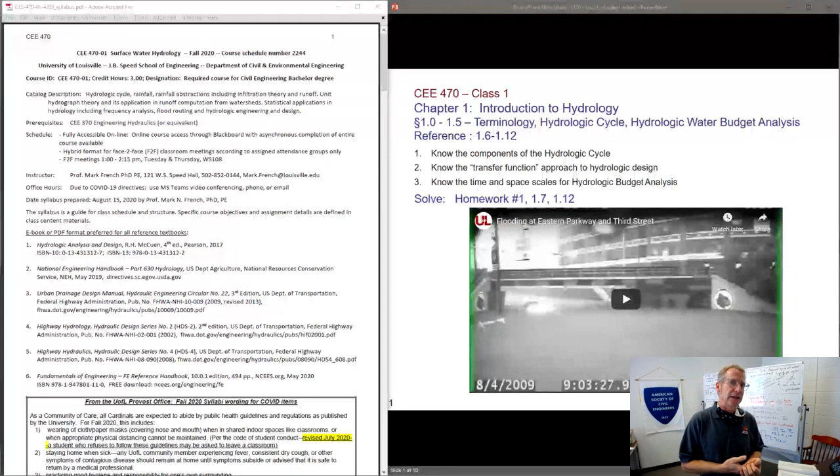As you know, our class meeting number 1 is entirely online. We won't be meeting in the classroom on Tuesday. This will be our presentation recorded. What I plan to do is make a recording something like this for all of our class sessions that you'll be able to view and watch online before class meeting if you want. What we will do in the class meeting will be to answer any questions about what this content is or any clarifications that are needed.

Again, you can log in through Collaborate for those online classes if you're not in the attendance group, which gets to why I have the course syllabus shown here again. The course syllabus overview was posted for you to take a look at, some additional information in there, so I'm not going to look at all the details here. What I want to go to in the syllabus is this course overview again. Remember that no attendance is required. Everybody is given an attendance group, and so those are the days you can attend the class.

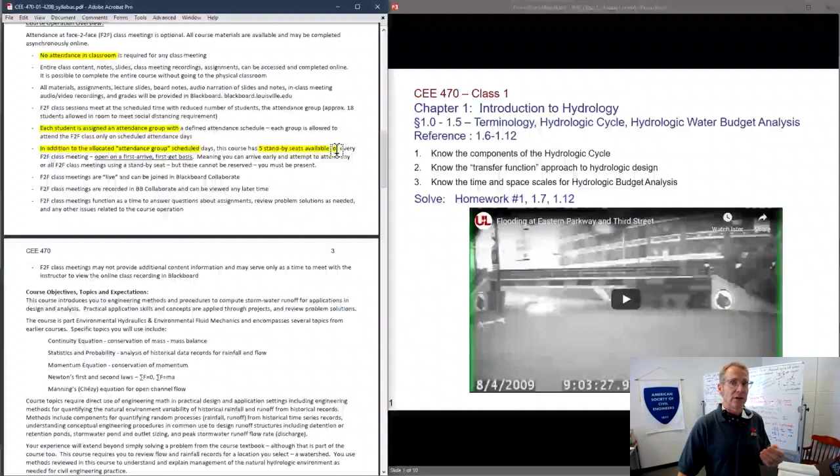In addition to the attendance group, there are going to be 5 standby seats available. So I believe I divided the class into 4 groups, and that still allowed for 5 more people to attend. So I've put those on standby so that if you wanted to attend additional days, more than your attendance group only, you can come in then. All right, that's how that's going to work. Yes, it'll be limited to the 5 first people.

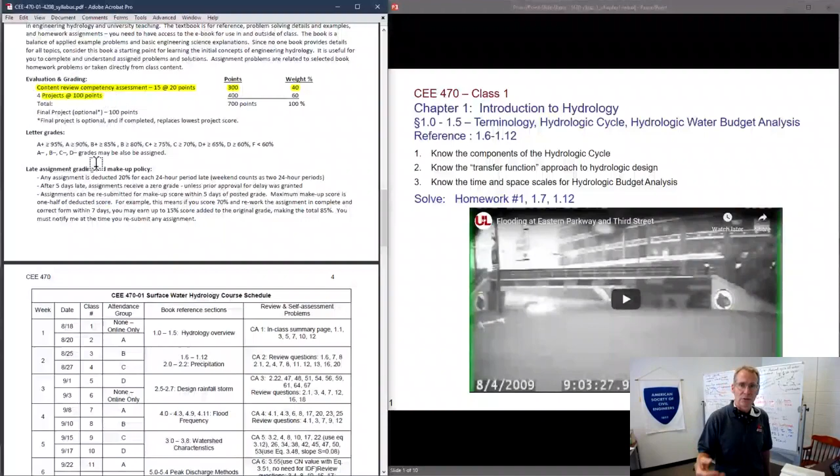What else? I want to look at our competency review assessments. These are going to be online through Blackboard. Those are going to form the content of what we get out of our book and the homework problems. So you will answer those online. That's my plan. So you won't have to submit any document that way. And then of course we have our projects. So the projects are the documents you will submit and work on. I believe project 1 is already posted. So we'll talk more about that in a minute.

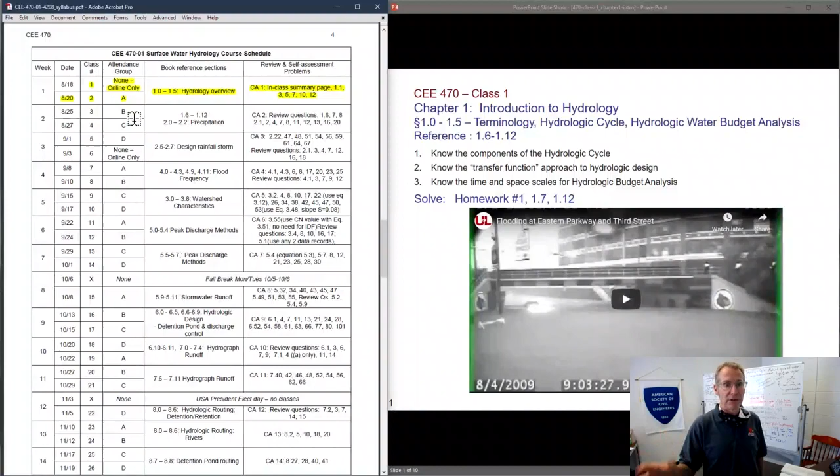So here's class 1. We're meeting only online for that. That counts as our Tuesday meeting. And then on Thursday, see if I can highlight that. Anyway, on Thursday, attendance group A can come to class, as well as 5 other people. If you're not in group A and you want to try to come to class, you can. Again, no class attendance is required. The content for class meeting 2 will be posted prior to that class, and you can review it just like this. All right, I won't go through all the details of the syllabus then. I think that is everything.

All right, so I'm going to close this, and we're going to start looking at our class content. We'll have the slides and the board notes together, and then I will go over those with you in this recorded session. So I'm not going to be writing the board notes up as we did before, since I can prepare them ahead of time, since all this has to be recorded anyway. So let's just take a look at this. What you see on the board notes right here, I'm going to switch to this pencil tool, see if I can mark that, for example.

Yes. So we will be looking at things out of our book that you will be asked to refer to and answer some of those questions on those assessments. Hydrograph, let's get to that in just a minute. I wanted to include here the parts of the book that we will be referring to. These are the 3 main topics, and that's what we'll look at on our class slides. I've included a couple YouTube videos for you to look at. These are right here in our own area.

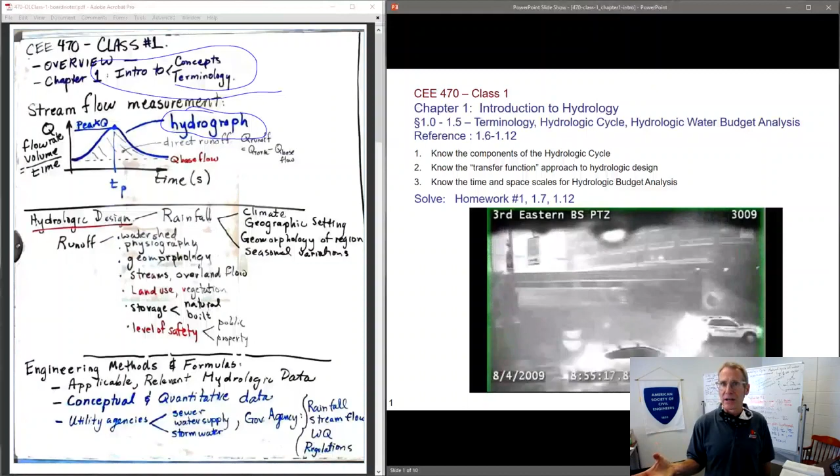This is, of course, the viaduct down at 3rd Street and Eastern Parkway, and it still is subject to flooding. But this is one of the issues with urban hydrology. And many of you will probably be working in cities and trying to help come up with ways to mitigate this. What are the ways we can mitigate that? It's a very challenging issue.

So if you watch this whole video, watch the cardinal bird there, you will see that that becomes, I'd say, about 2/3 submerged. And next time you're out there, you can see how deep that water is. I believe they've got it marked, you just can't see it here. There's another cardinal bird right over on this one. So you see somebody driving their car into the water, and that's partially because it's very hard to tell what the depth of water is when you're driving.

So from a transportation engineering point of view, it's important. From a utility point of view, it's important to try to prevent or understand at least how our infrastructure is going to be responding to rainfall runoff. So that's an important thing for us.

One old-timer rule of thumb is, and you see this railroad is built way up above, even before that viaduct was in there, that railroad may have been built. And they say that in the old days when railroads were getting put into the U.S., typically they would be well above the high water marks that were evident to the surveyors that were laying out these routes and elevations for the railroad beds.

So if you didn't have any other information on how high to make your roadway, and you wanted to stay out of the most severe floods, you could use those as an indicator. Anyway, I'll let you watch that. Let's go on to the next slide.

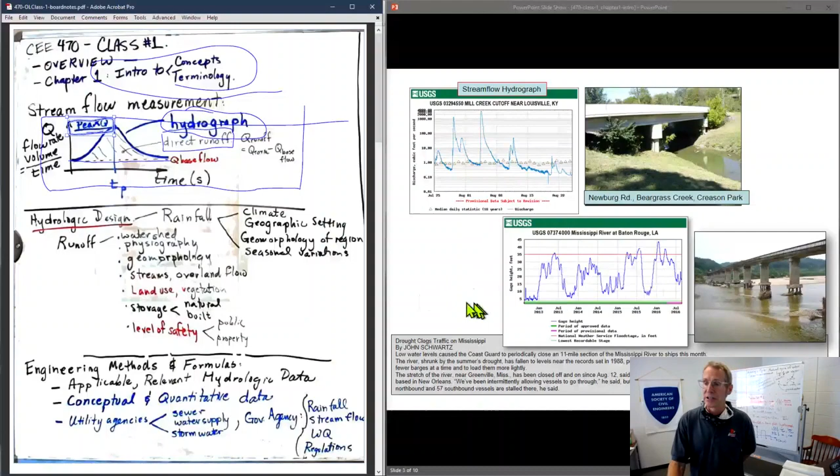So it's kind of like the inverse of a bridge going out. Here they don't need a bridge, but they need the water. And when that happens, it can be an issue. So predicting that flow is a very useful transportation engineering thing. All right, let's go on here.

So here are some of the design criteria for rainfall. We need to know what climate we're in so that we know the setting. If we're in a desert kind of geography, we're going to get a different kind of rainfall than if we're here in Louisville, Kentucky. Same thing if we're in a mountainous area. We're going to get a different kind of rain. So understanding that is an important part for doing design, and then knowing also what kind of criteria we have that we need to meet.

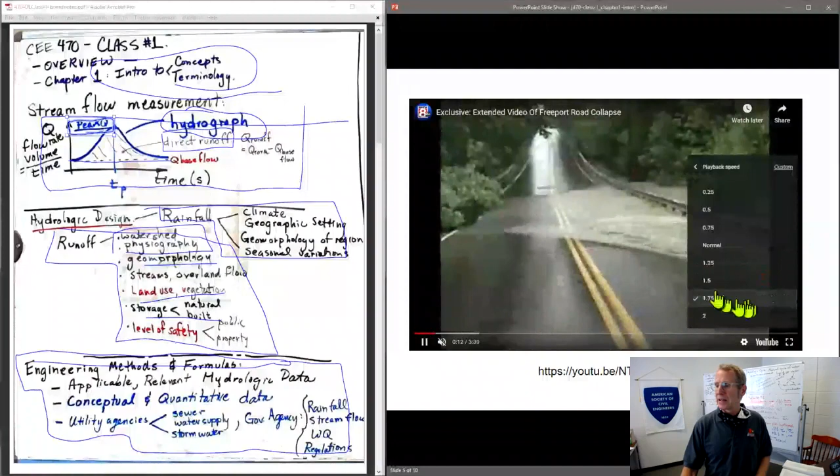So here is that typical kind of roadway issue. So for whatever reason, the pipe under the roadway either became blocked or it wasn't designed with a capacity large enough, so the roadway started overtopping. And once that happened, we started to probably get severe erosion around the pipe. Now you can see what's happening is eventually that pipe gets washed out. Now why are these issues? Again, public safety here. If this were at night and you were driving on this road, probably someone would not see that that road was at a critical state.

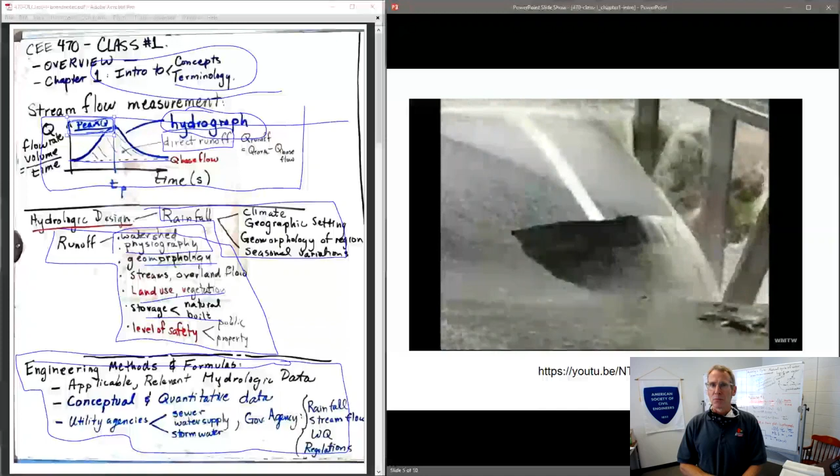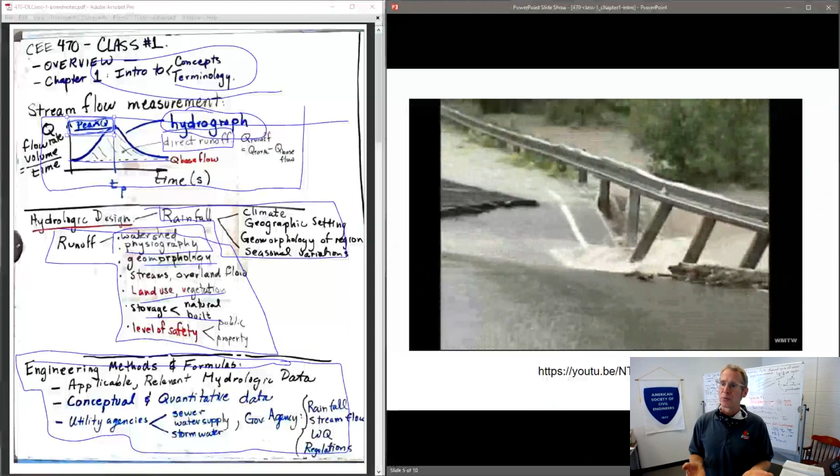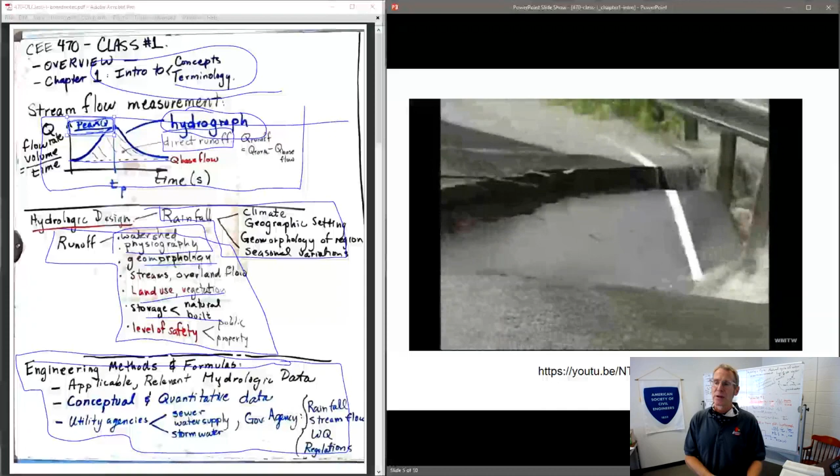So let's see what happens here. So water became ponded basically behind the road embankment, and it didn't have an outlet. So providing outlets for the water and knowing how much water you can expect for a given road is an important issue. So just putting a culvert in of some given size may not be enough. You have to account for where that culvert is located. So it's possible the water flow alone could have passed, but maybe you can see this is in a wooded area, so someone needed to account for the debris from a wooded area getting washed into that culvert, possibly blocking part of it.

So I think this is almost done. Yeah, let's just watch, because you'll see that by the time all that water erodes through, there goes the culvert pipe. Looks like it could have been large enough, but it's hard to say if it was blocked or there were some other maintenance issues there.

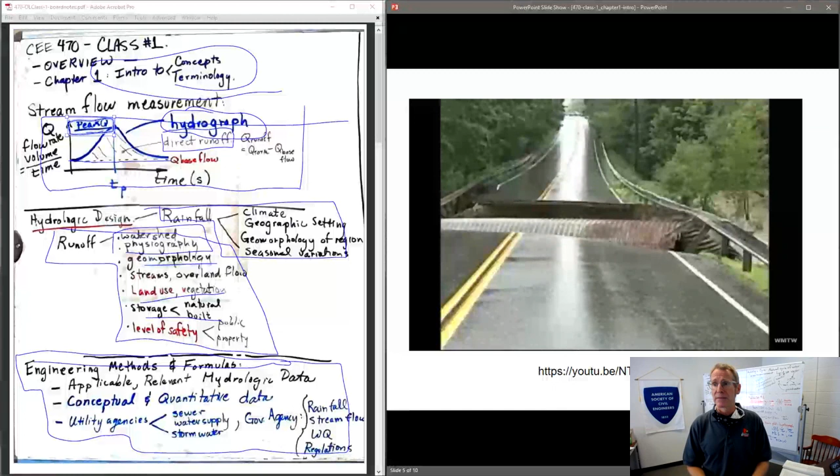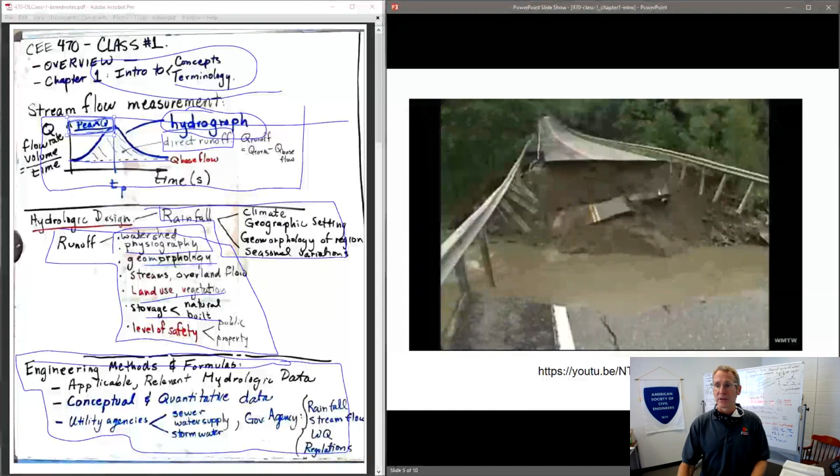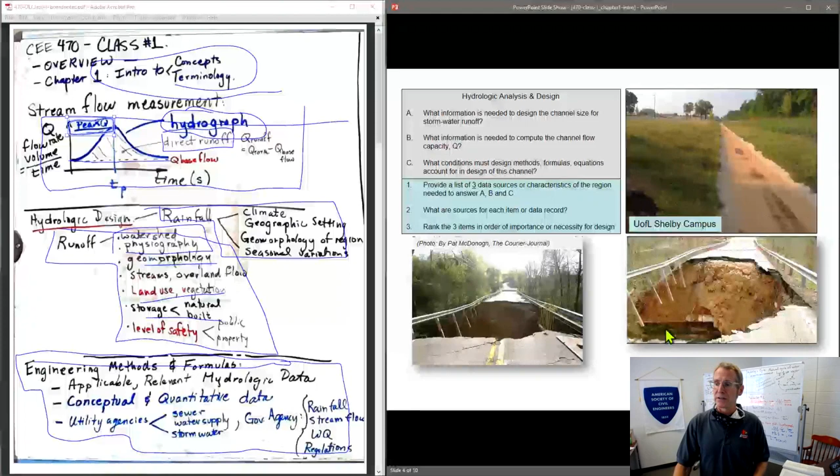All right, let's go on. Next.

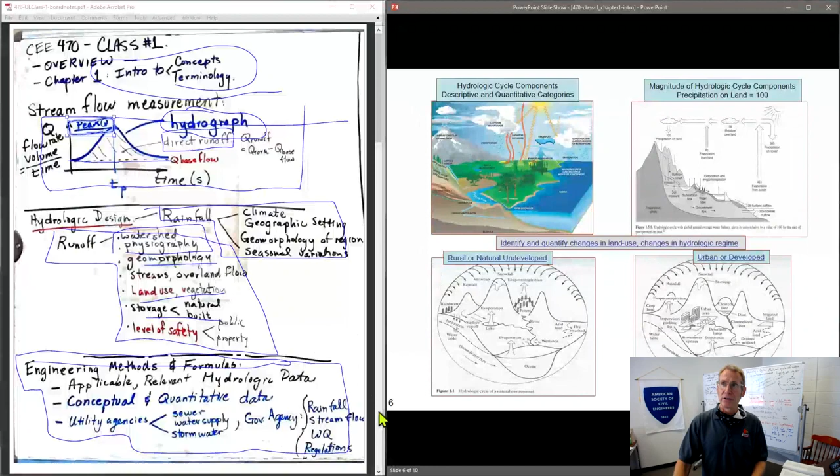Yep. All right, so the hydrologic cycle, I think let's go to the next board note here. Trying to make sure we're not trying to spend too much time on these. I'll hope to keep these down to about 20, maybe 30 minutes.

So the hydrologic cycle, this is part of chapter 1 content. I'm going to ask you some things about this. This is, of course, just what you would expect. How does water move in the earth? So the important part to note here is how it goes through liquid to vapor, evaporation. And then it falls as precip. And it can be rain, snow, ice, any kind of frozen or non-frozen precip.

What happens to that? Some of it goes into groundwater, but some of it becomes runoff. And that is really the focus of this course. How much becomes runoff? And how much is the precip for your area? So if we can get those two things, accounting for all of this in between, then that's the goal of our class. And of course, here's a couple other terms.

We want to account for what we call losses, whatever goes to groundwater. Some goes to plants if we have those and they're significant. Plants taking in water and respirating, we call that transpiration. There's also direct evaporation of water. If you combine those two together, we use this term evapotranspiration.

I've included these slides over here. Note that the slide shown on the right here sets precip as 100, and then all other components of the water cycle are shown relative to that. So for example, evaporation from land is 61, so 61% of precip on land comes from evaporation on land. 39% of that precip is the moisture over land.

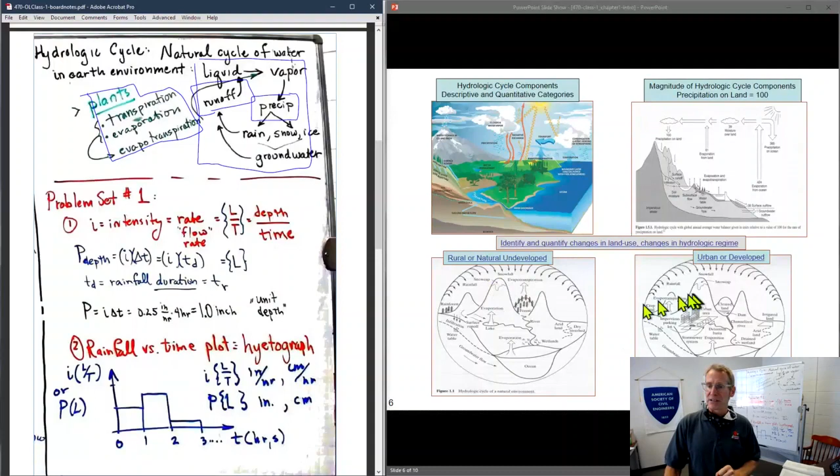Then these two lower pictures are from our book. And what they're trying to show you here is what happens to a watershed when you go from natural conditions to developed conditions. And so we can see some of the components stay the same. And of course, this is a light cartoon drawing. The mountains still are going to have the snow. We're still going to get infiltration. What they want you to see here is now when you put in impervious areas, we block some of that infiltration, so it's reduced. That gets caught into our stormwater sewer system.

Still have evaporation, still can have wetlands, that kind of thing. So a couple other things that are shown here, detention basin, so we'll be looking at that. That's an important part of engineered hydrology. All right, let's go on here.

Problem set 1. Let's see if I've got that here for us. Yep. So I've got it listed here. It says homework assignment 1. I thought I changed that, but our assignment number 1. Let's see right here. Yeah, I've given you this just to get your mind thinking about how we have to analyze hydrology and hydrologic problems.

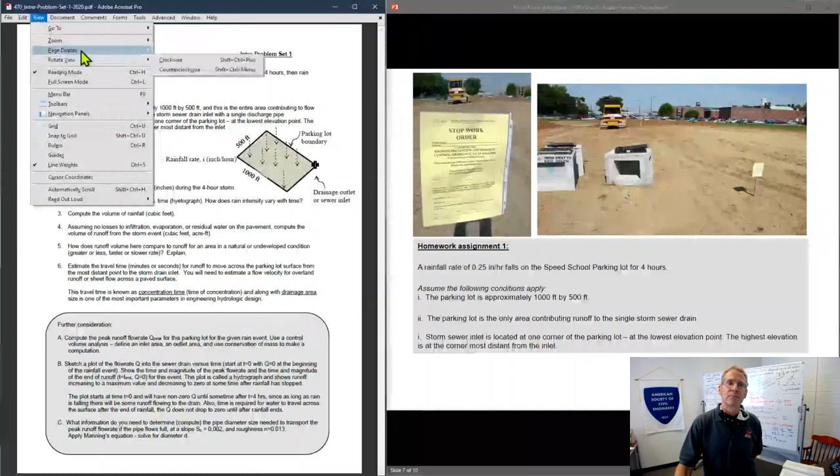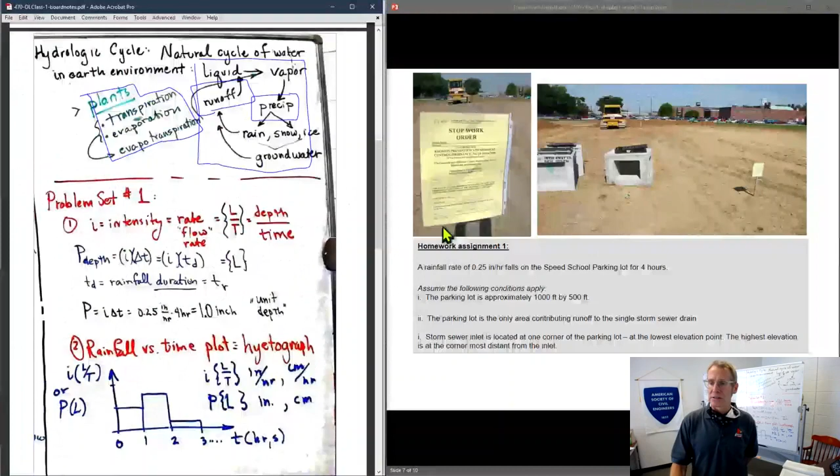So the idea of that is that we want to look at inflow and outflow, and that's kind of the focus of what we're going to look at here. And also looking at some of the terms and concepts. They seem simple, but you've got to be able, again, to really put a number on doing these calculations. I'm trying to bring up these board notes again so we can look at those. So let's take a look at the assignment here and see what we've got.

I've given you this parking lot. We're just saying that it's a Speed School parking lot. This slide showed the construction of that parking lot. If it's raining a 1/4 inch over 4 hours, then I want you to do some calculations on that. The parking lot we're going to say is 1,000 feet by 500 feet, and we want to look at how much water is going to come off of that parking lot.

So just to get started, pretty straightforward. This I'm calling problem set 1 then. And first thing I ask is, what's the depth of rain? So some of the interesting concepts from this is that you're given intensity of rain, not depth. So you might say, well, it's pretty easy for me to know that intensity is depth per time, length per time. So if we want a total depth of rain, all we need to know is the duration of that. Well, that's true. So all of these things come into play, though, on our terminology, being able to describe what is the intensity of rain versus the depth of rain.

So what is the missing thing I need there? I need to know the duration. Is that an important part? Yes, because if the duration is very short for a given depth of rain, the intensity is very high. If the duration is very long for a given depth of rain, the intensity is very low. And that can give very different results in terms of the runoff.

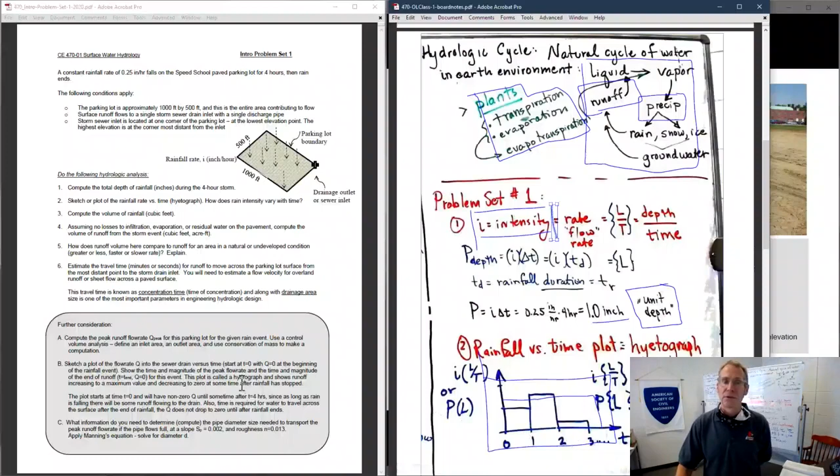It says right here that the rainfall has a constant rate of 0.25 inches per hour. So it's the same for every hour. So if I was to draw, I would just draw a straight line for the 4 hours, and that would be the plot. So note these things. These are part of our quiz online that we have. What's the rainfall volume? Let's go on. Next slide.

Just as you would expect, here's our area, a rectangular area. We know the precip depth. If we want our volume of rain in cubic feet, depth times the area, you're going to get a volume. So the volume of rain, do that calculation. And part of what I want you to take away from this is you're going to have to start thinking not necessarily about the physical properties of water like we did before. Remember the density or specific weight of water.

Now what we're going to be working with a lot are land area sizes. So how many square feet in an acre? 43,560 square feet in an acre. How many acres in a square mile? That doesn't come into play here right now, but it will later, because some methods like acres, some methods want us to use square miles. So we have 640 acres per square mile.

All right, let's go on here, do the product of depth and area size. What is our depth? 1 inch. Convert that to feet. How about our area? 500 by 1,000. So I came up with this number. You're going to want to check my number. Convert that to what we call acre feet. So that would be, if we had 1 acre, what would be the depth of water in feet for that?

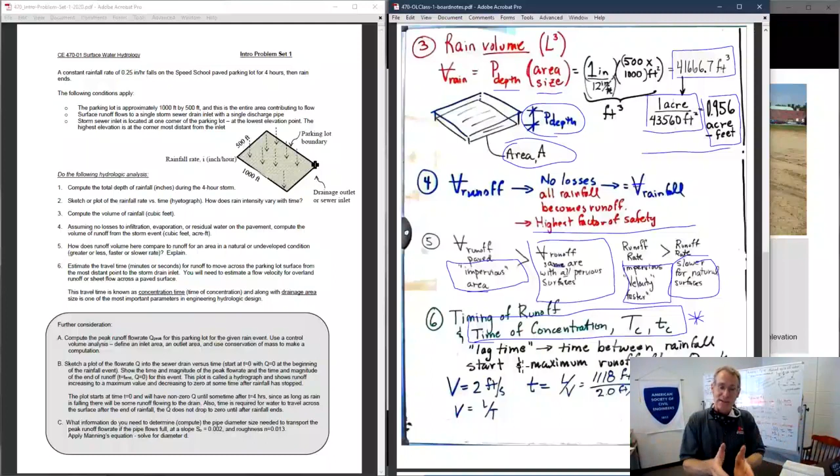All right, what is concentration time? It is related to what we call lag time. Imagine water falls on a surface. If you were at the outlet and it started raining, you wouldn't immediately see all that water coming. Why not? It has to travel across that surface. Once it starts traveling from all the points and reaching that outlet, you're getting a lot of water. If the rain keeps going that long, that flow will be at its maximum when all the water is reaching your outlet point. So that is our point of interest for engineering, time of concentration.

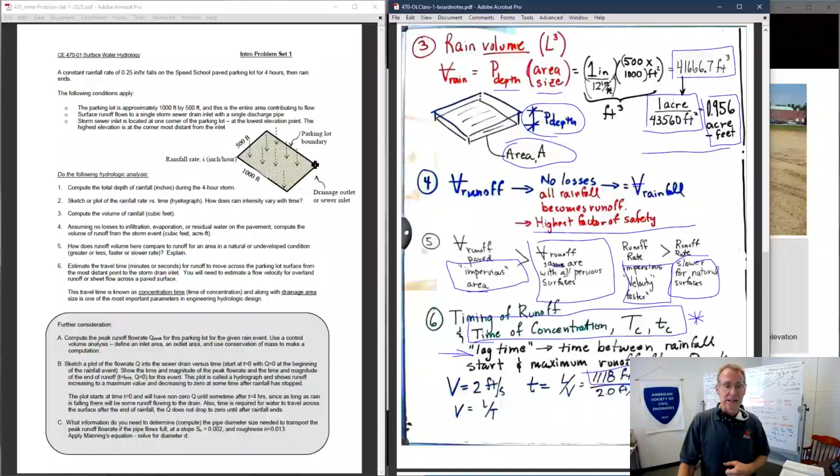So for this example, we just calculate the length. I took the diagonal, came up with this distance, and divided by some estimate of the flow velocity. You have an idea of what this should be. Should it be 0.1 feet per second? Probably not. Should it be 10 feet per second? Well, maybe not, unless it was very steep. So I picked a number of 2. You could probably argue for anywhere from 1 to 3 or so, maybe 4. So put in your number here. Doing that, I came up with 559 seconds. Put that into minutes. I think I asked for it in minutes. You get about 10 minutes. So maybe that's about right. Our parking lot out here is pretty flat.

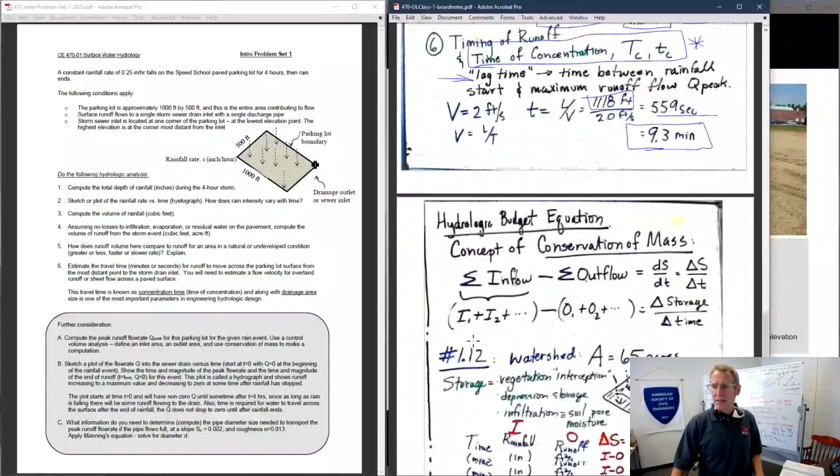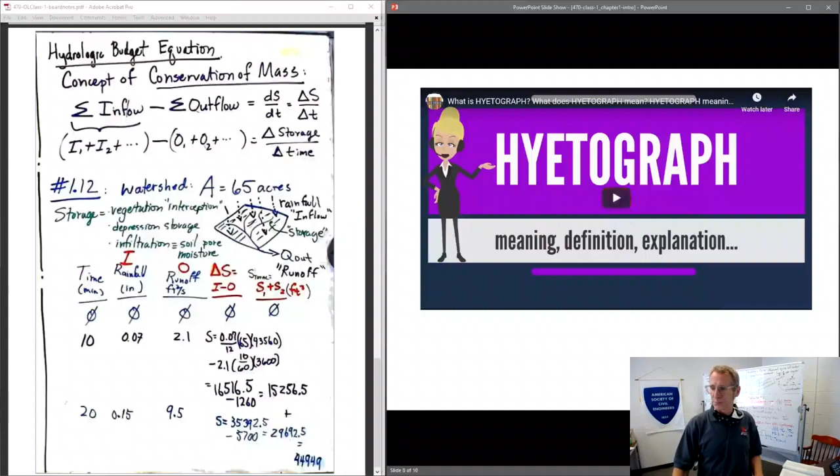All right, let's see if we have anything else on today's class. Let me go to the next one. Hydrologic budget equation. We want to look at that, and I want to work this last problem out for you. So that's the last topic of this class. Oh, I included this. If you want to hear something about the hyetograph, go ahead and listen to that. That's a very short video. All right, so let's look at our last thing.

Our last thing is the transfer function and hydrologic budget. Because of the unknowns in hydrology, a lot of times we use what we call conceptual models. Basically there are equations that have inputs and a simplified equation that represents what we really want to know, and then we get the output. We're unable to capture all the physics that we did in hydraulics because we're dealing with nature and a lot of uncertainty about information in a vast area, say a watershed, where it has different vegetation, land uses, and even the moisture content is going to influence our study. So what we use is something called the hydrologic budget equation.

It still applies this concept of conservation of mass like we looked at in hydraulics. Inflows and outflows, take the difference. Often in hydraulics we said that was zero, so we looked at inflow equals outflow. Usually not the case in hydrology. We have to account for the storage term. So sum all the inflows, subtract off all the outflows. That's going to give us a change in storage. Whatever didn't flow out accumulates in storage.

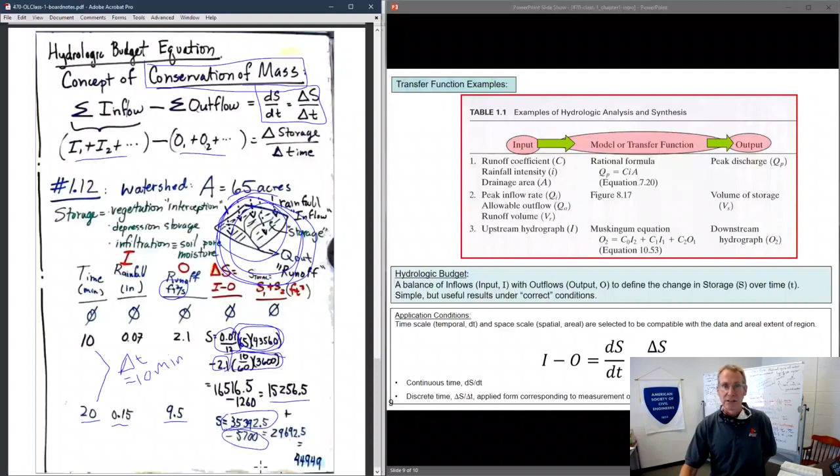All right, we get rainfall was 0.15 inches, and the outflow is 9.5, not inches, but feet cubed per second. Do the same calculation, see if you get these two numbers. So again, we still had more inflow than outflow. This was the incremental amount that we ended up with. 29,692.5, again, still positive. So now the total storage, we keep a running total. Both of these were positive, and we end up with this one, 44,949 feet cubed. And I think that's it.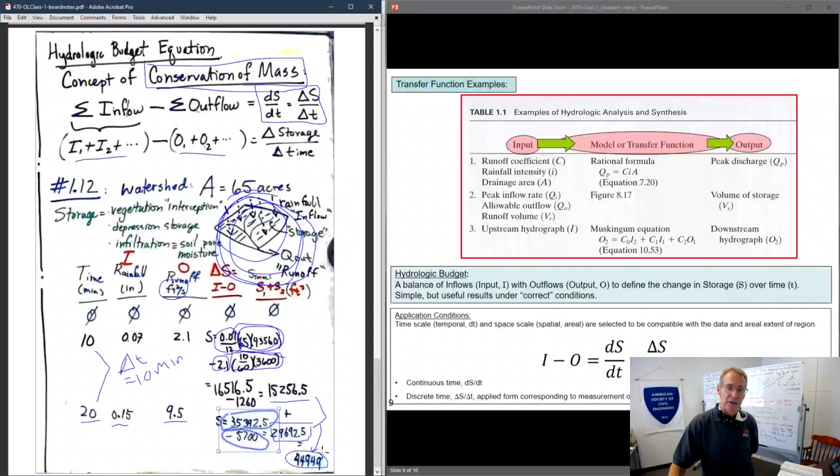And then, of course, things we need to account for are soil and vegetation impacts on subtracting rain from what we're going to see as runoff. How will you do that? Some of you probably already know some of those methods from your co-op. We'll be talking about that more. Then what about storage of water also in any kind of depression storage, river channels, man-made or natural, lakes, ponds, that kind of thing.

And then, of course, the inability to forecast rainfall to an exactness where you could tell somebody the Eastern Parkway culvert's going to flood in the next 3 hours. So that is something we still are facing.